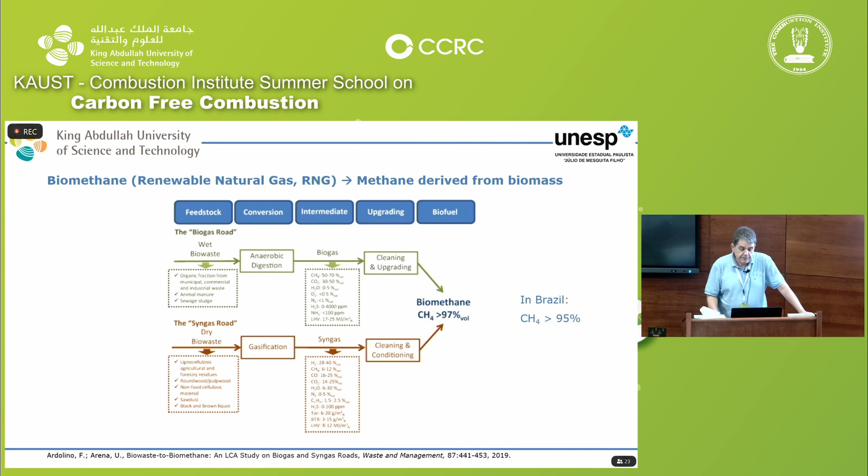The contents of my presentation: I'm going to talk about fuel gas interchangeability. How many of you are aware of the Wobbe index? Heard of the Wobbe index? Okay, good that I explain it. I'll cover biomethane production and distribution, use in industrial equipment like glass melting furnaces, ceramic tile furnaces, fluidized bed, sand dryers. I'm going to talk about some economic aspects and conclusions.

So, interchangeability. If you have a stove at home burning LPG, your burner is designed to burn LPG. Suppose now you want to burn natural gas in the same burner - it's not possible. You have to do something to the burner, because if you put natural gas in a burner designed for LPG, you're going to have a blowout of the flame. On the other way, if you have a burner designed for natural gas and you burn LPG, the flame will become yellow and make the pan very dirty with carbon residues.

So what do you want, instead of changing the burner? Here it's easy because it's a simple burner, but it's very complicated in terms of design because it is partially premixed. But what do you want? You want to put a fuel that does the same job - you don't want to change all the settings.

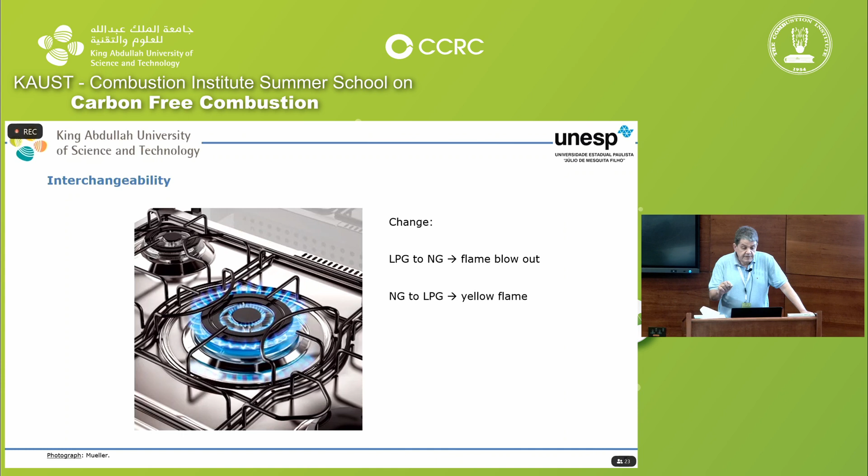Suppose here we have only one burner - it's easy, you have parts to make the change from LPG to natural gas, you can buy them easily. But suppose you have an industrial furnace with hundreds of burners, sometimes 10, 12, 20, 50 burners there. You don't want to change the burner. So what you do is prepare the gas. For example, if you have a furnace designed to burn natural gas and you want to burn LPG in there, don't just put the LPG - you mix LPG with something so that it becomes similar to natural gas.

And this is the Wobbe index, okay. The Wobbe index is the most important parameter for defining interchangeability. It's an indication of whether a burner can be operated with an alternative fuel without requiring adjustments or physical changes. So it's like having a car - you want to burn another fuel, but you don't want to buy another car. You want to prepare the fuel to burn in there.

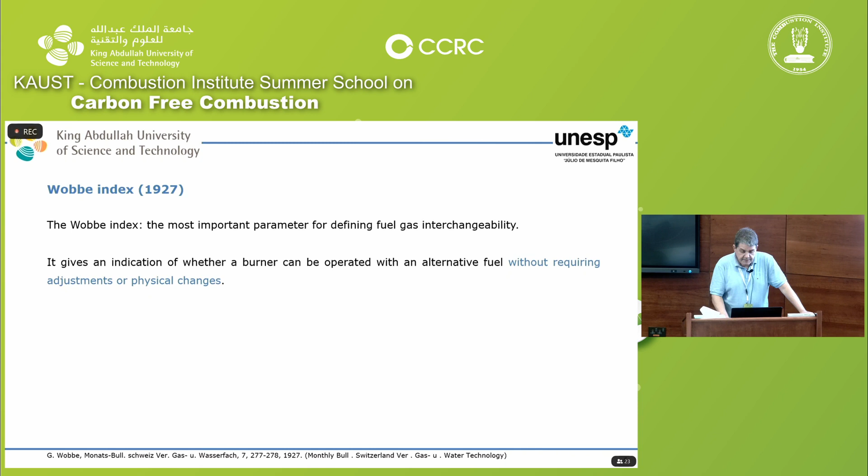The Wobbe index was developed in 1926, 27. I leave all the references at the bottom of the slides. The Wobbe index arises from the thermal energy in kilojoules per second, which is the calorific value of the gas - I'll discuss some about it. Sometimes it's not the calorific value of the gas, but the heat you need to have your product at the required temperature. But anyway, let's accept that: calorific value of the gas times the volume flow rate of the gas, so kilojoules per normal cubic meter multiplied by normal cubic meters per second.

So the formula... how do I get this in here? Go in there.

Okay, so the formula is here. You have a calorific value of the gas, and then this is the area, the orifice discharge coefficient. You can think about an orifice, and delta P over rho, square root of this, it comes from the Bernoulli equation, okay?

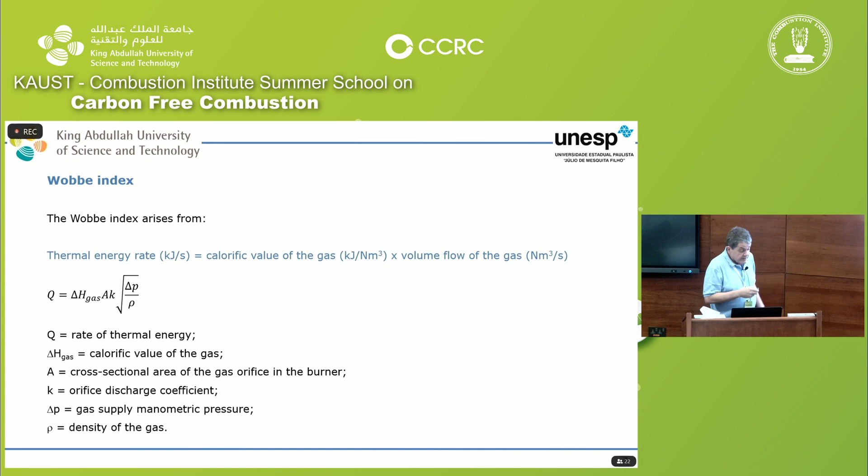So the formula can be written as, if you divide the density by the density of the air, you have here the relative density of the fuel, okay, or the relative to air, or density of fuel relative to air.

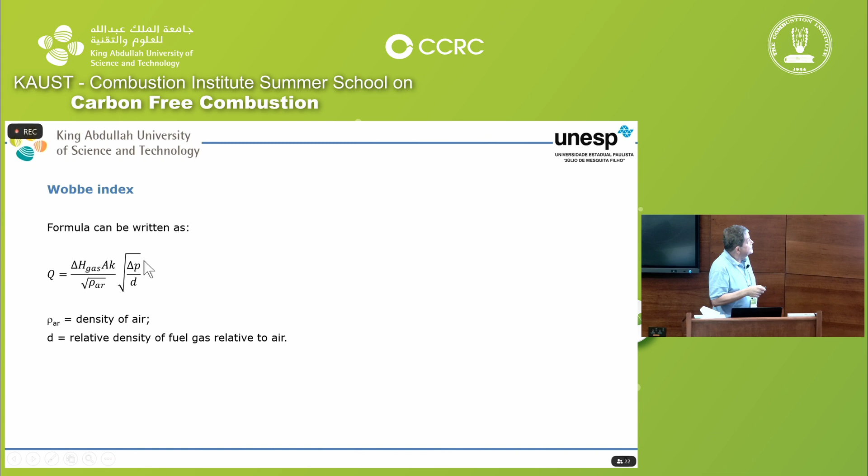Wobbe defined his index as delta H, or the calorific value of the gas, divided by the relative density, so that you have, just putting there, is the index. The Wobbe index times the area times the discharge coefficient multiplies the square root of the manometric pressure.

So in here, there are two types of Wobbe numbers. One is called the high. Instead of putting here, you put here the high heating value, and the low is the lower heating value that goes in here. I prefer to work with the low heating value. It doesn't matter which one you use, because you're going to compare, okay?

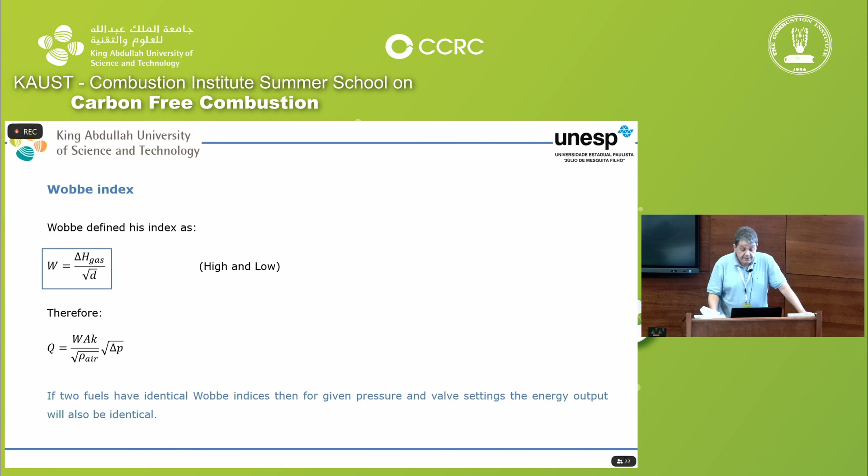So if two fuels have identical Wobbe index, then for given pressure - you see, given pressure here, okay - and valve settings, this is most important, the energy output will be also identical. One of the criteria for interchangeability of two gases is that the index are approximately equal within the range of plus or minus 5%. So to achieve an appropriate Wobbe index, gas mixtures are used for substitution.

Okay, so if you want to burn LPG instead of natural gas, it has to be mixed with something. A mixture of LPG and air is called, at least in Brazil, propane air - ar propanado. Not sure if it is the same. We have here something similar that we are burning.

We had a crisis in Brazil in 2008 and 2009, and industries were trying to get an alternative for burning natural gas. So we did some study on that. Just calculate the Wobbe number for natural gas, then you make a mixture and make it with the same Wobbe number.

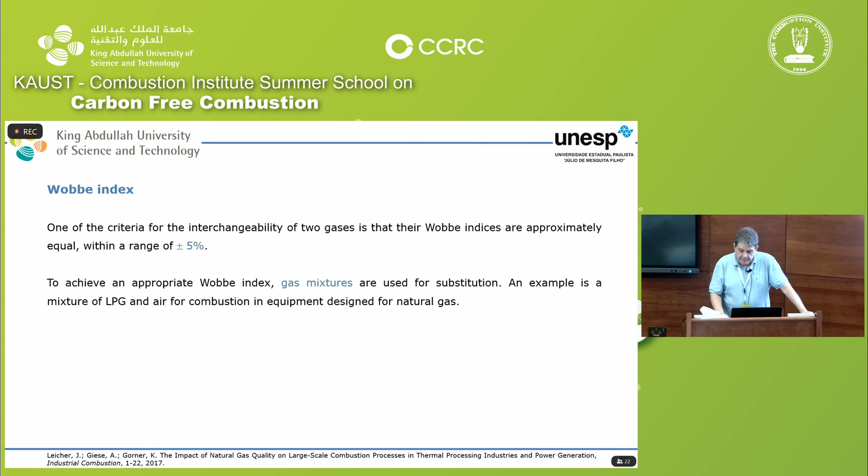There is also a modified Wobbe index, or Wobbe number, that takes into account the temperature of the fuel. It is the same thing, except that there is a temperature in there.

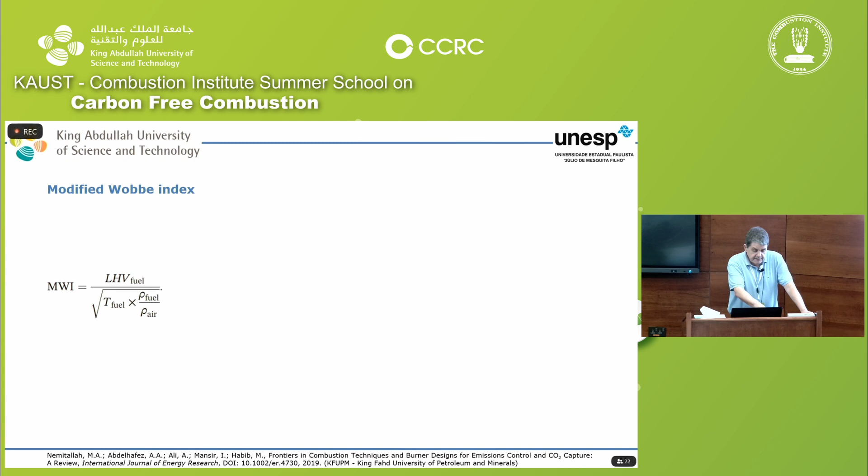Okay, you think, well, I have a burner here and I want the same energy output. Why don't I just increase the delta P? Okay, you can do it if you have one burner.

And each of the zones, they have their own settings, their own burners. So if you want to increase the delta P, or the pressure difference, because you put another fluid in there, another fuel in there, then you don't distribute it equally. Then it becomes a mess.

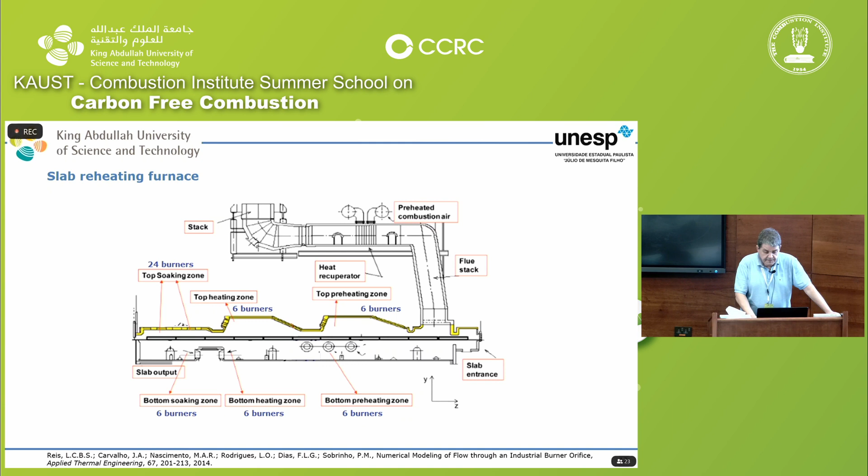And what you want in a furnace like this is the product. Okay, you have to have this slab at 1,200 degrees Celsius at the rate of 180 tons per hour. This slab, the weight of it is about 20 to 22 tons.

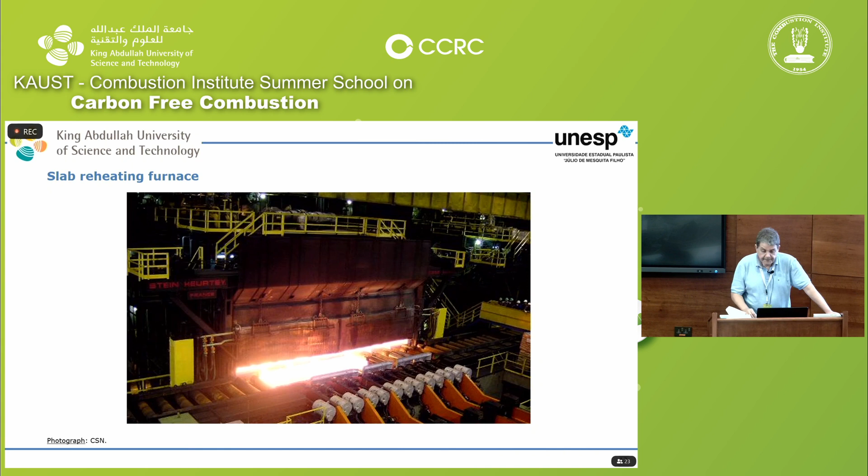Then you have primary aeration for premixed or partially premixed burners. Flame blowout is very important - I will show you one industrial application in which you cannot change the gas. You have to prevent flame flashback. So there is another index. Yellow tips, when the burner is partially premixed, you don't want it, so there is an index for that. Incomplete combustion.

It gives you a degree of how much CO you're going to have in the same settings. I'm going to talk about some...

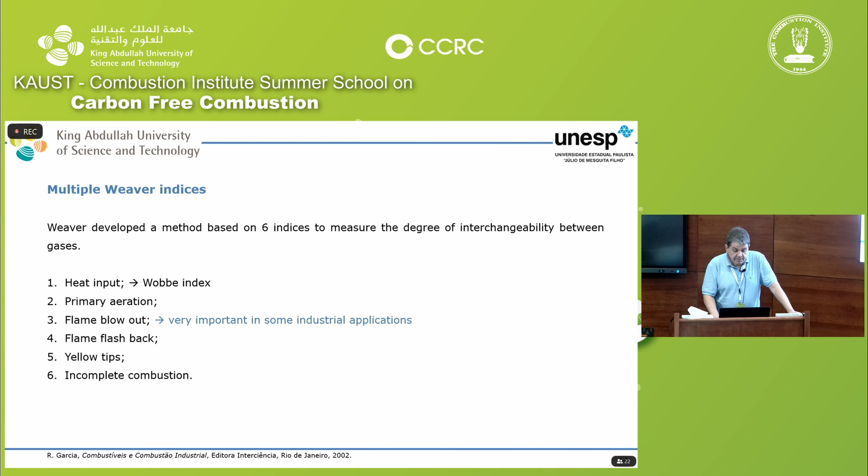Steel production gases. In steel manufacturing or steel factories, you have three types of gases. One is the coke oven gas that comes from the coke oven battery. The coke is something that you have to feed to the blast furnace. A residual gas from the blast furnace is called the blast furnace gas, BFG.

The composition, I took it from a site here, is about 20% CO, not 20% CH4. It is a very low calorific value gas, but it is energy. So why not use it?

And there is another one, the converter gas, called LDG, because it was first derived or studied in Austria, in the cities of Linz and Donawitz. This comes from the converter, also called BOF, Basic Oxygen Furnace Gas.

In Brazil, we have this at about 70% CO. It's a very dangerous gas, very dangerous. With 70% CO, there was an accident one day at CSN, Companhia Siderúrgica Nacional.

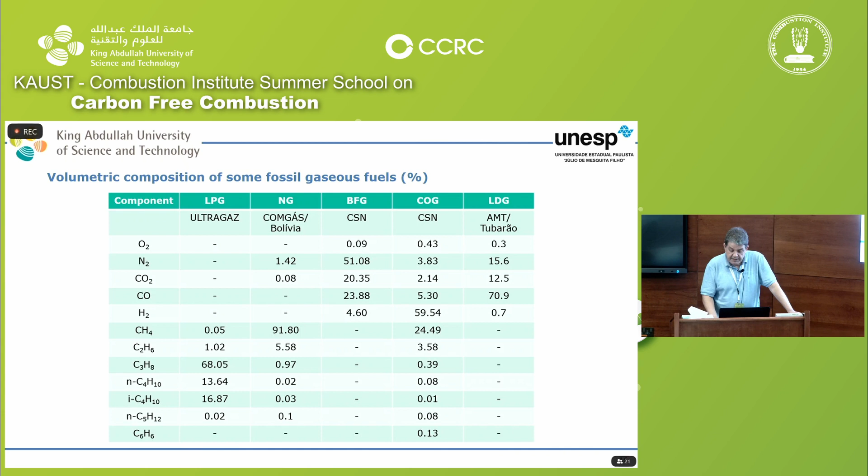So this is another project, another problem we got involved in: coke oven gas, as you see here. Coke oven gas has about 60% hydrogen.

This amount of hydrogen makes it a fuel that anchors in the burner. It becomes stable because of the amount of hydrogen. You saw earlier that hydrogen has a very high flame velocity, so it's easy to anchor any flame with hydrogen.

In one of our experiments, we had a free flame of methane, and we used only 3% hydrogen.

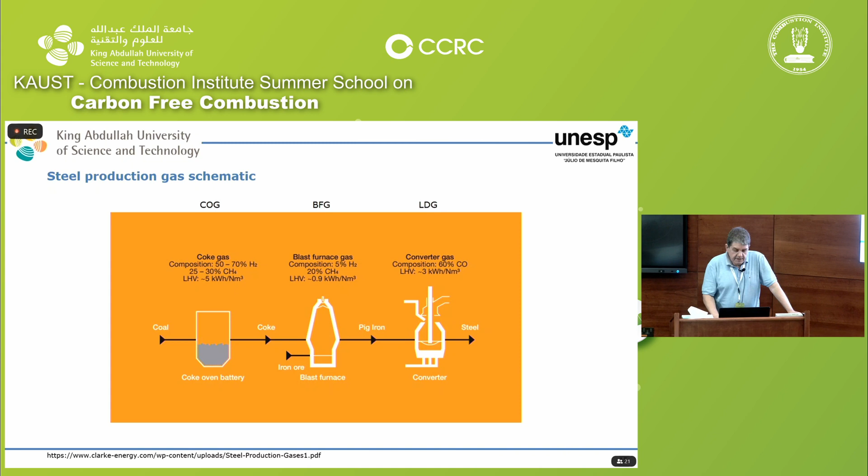So what do you have there? You have 212 U-tubes, about a quarter of them on top, a quarter down, and the same on the other side — half on one side and half on the other.

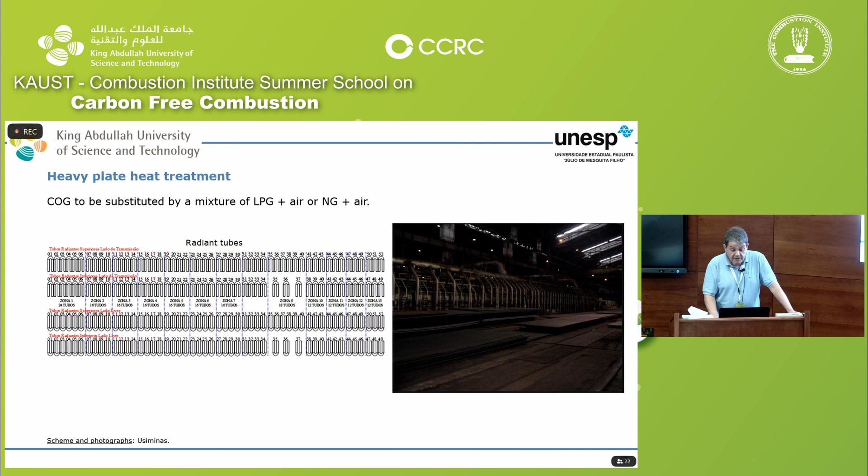What happens? You can make this mixture, but it's not going to hold in the burner. A problem arises when the flame goes out — you see these are the U-tubes that go inside the furnace. Here's the burner, it has a swirler, and this is the damaged tube.

So what happens? When they open the furnace for maintenance, about 25 to 30 tubes are damaged. You know what happens: because the coke oven gas is a dirty gas, it makes the diameter for the flow smaller as it deposits there.

So what happens is the flow gets high velocity, and sometimes the flame detaches from the burner. Then it travels through the U-tube, and the furnace is hot. Then you ignite the whole mixture inside the tube, and you have this kind of problem.

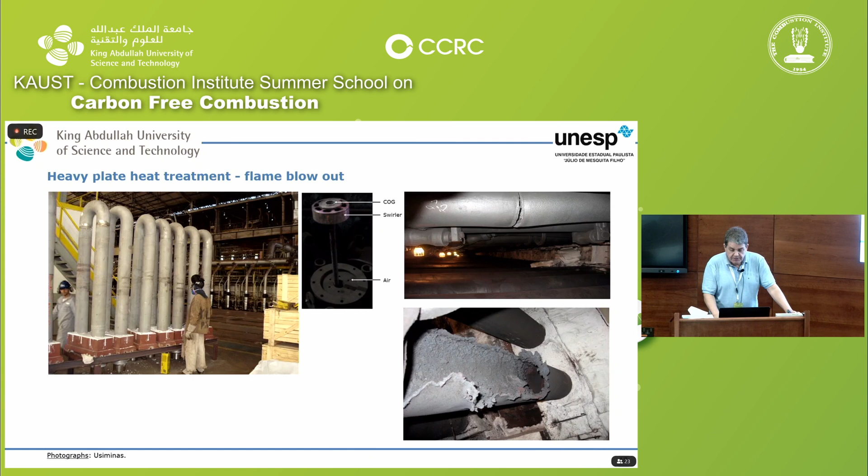So when it's impossible to change it without doing anything to the burner, you cannot do it. Other parameters for interchangeability are flame length, flame emissivity, furnace atmosphere.

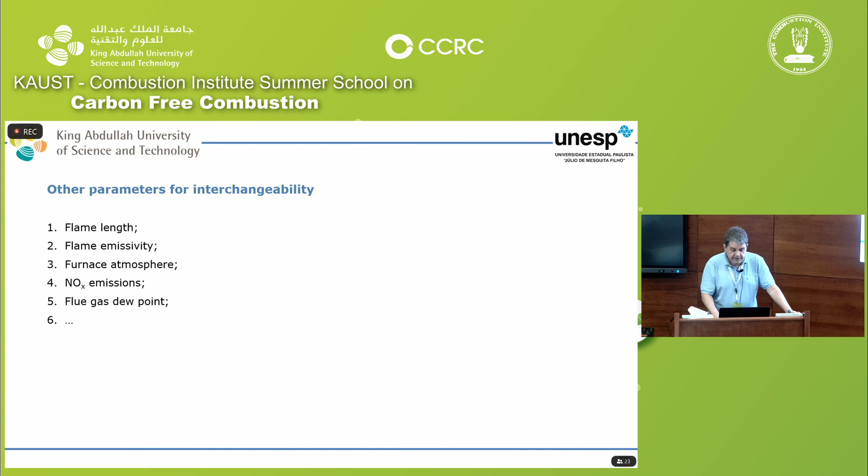You can put another gas in there and ruin the furnace atmosphere — NOx emissions, flue gas dew point. And here I have an example where the flame length is important.

You have, for example, a sintering machine. Sinter is one of the materials that go into the blast furnace. Besides agglomerating the mineral, it also contains some other materials that are necessary, like some carbonates. And it has about 5% - the sinter is mineral with 5% of coke, a very high carbon content.

Coal, okay? So it has about 5%, you have to ignite it. And the burners are burning from top to down. You can see the flames in here, okay?

Ignition requires some energy, and this energy has to be conserved. When you change the gas, you have to provide the same amount of energy. Also the flame cannot spread over the mixture - cannot spread, and also cannot be so very far from the mixture. It has to be almost touching the mixture so that it ignites.

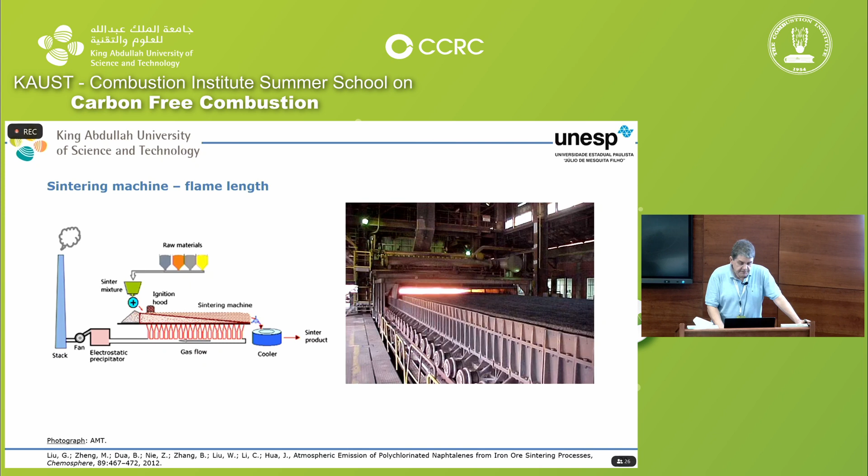Okay, now we start with biomethane. I told you about interchangeability. If you have a biogas, okay, and this biogas usually has from 40 to 60% of methane. In here, they're saying 65% is too much.

Because maybe this is biogas in Germany, but in Brazil, no. Brazil, it's 40 to 60. So methane goes from 40 to 60, and the CO2 goes from 60 to 40.

So you have many processes to extract the biomethane, and the ratio is about 400 normal cubic meters per hour produces 260 cubic meters per hour of almost pure methane. It is just a measure of how much CO2 you have in the biogas.

And then you have a residual gas with a lot of CO2. And when you take the biogas from a landfill and you produce a biomethane, or you either burn the biogas, doing a favor to the ambient. Okay? Because biogas is supposed to account for 14 to 15% of greenhouse gases from landfills because of the CH4. So you have a carbon credit just for doing this.

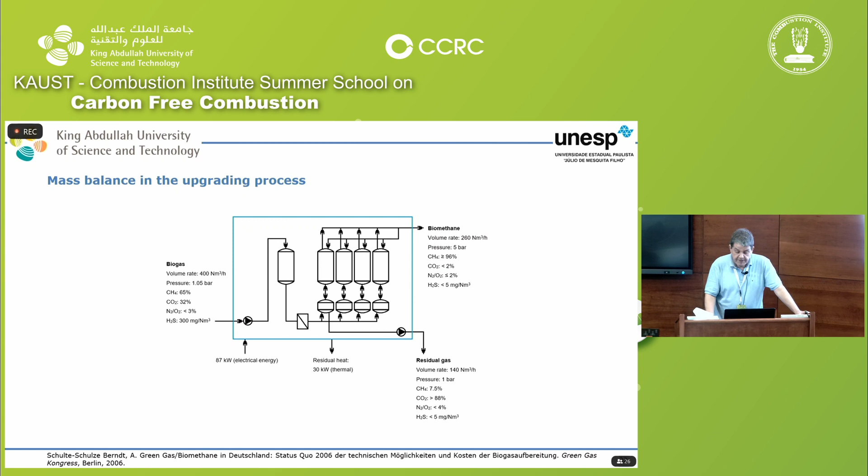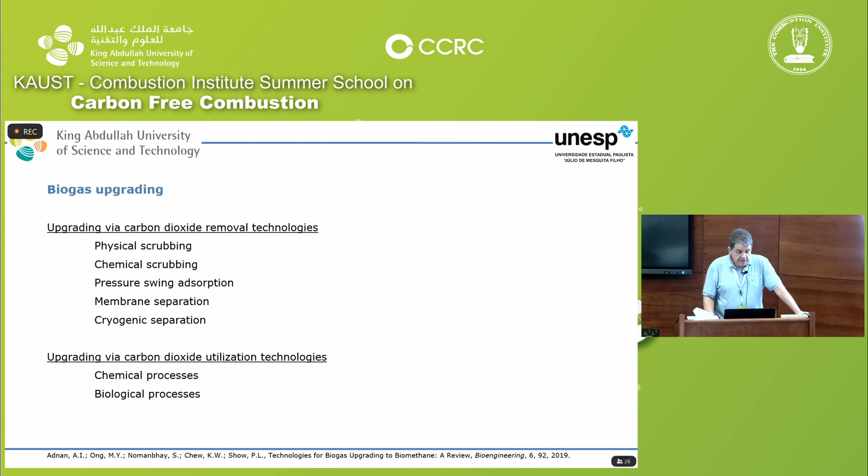Upgrading, biogas upgrading. Upgrading can be via carbon dioxide removal or carbon dioxide utilization. And there are several types of technologies, and all of them are described in this paper here, in 2019. It's a very nice one because for each technology, it presents a table like this.

You can easily see. I just took one from there, membrane separation technology, which is used in the case of the biomethane that we have near our home in Brazil.

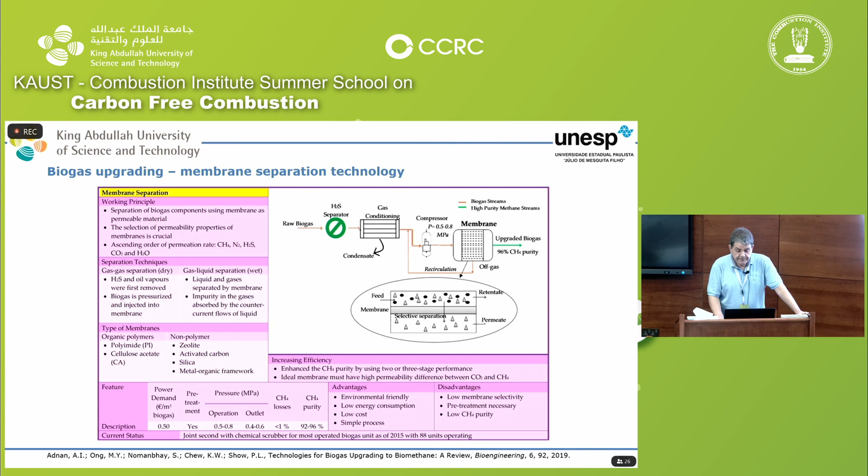In Brazil, we have today 4 plants authorized by ANP. In São Paulo, in Seropédica, which takes the municipal waste from Rio de Janeiro, about 10,000 tons per day.

Okay, if you think about a population, you can estimate how much waste comes from them. It's about 1 to 1.2 kilograms per person. São Pedro da Aldeia, also in state of Rio de Janeiro, and Caucaia in the state of Ceará.

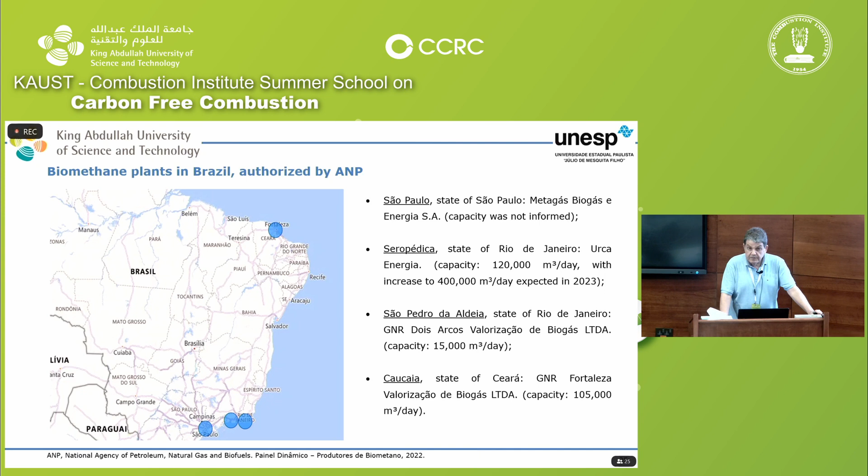In here you have also other plants, but they're not yet authorized by ANP. They are just starting development, okay?

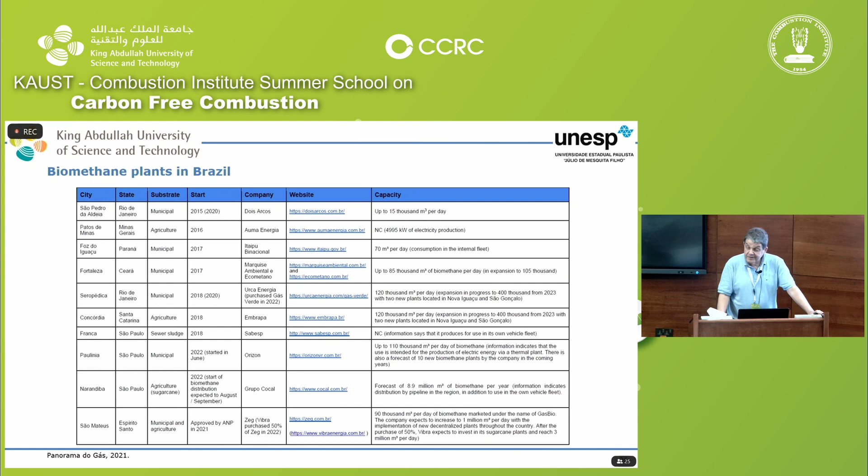In Brazil, we don't have a network for biomethane. It's delivered by trucks. And the trucks are moved by biomethane.

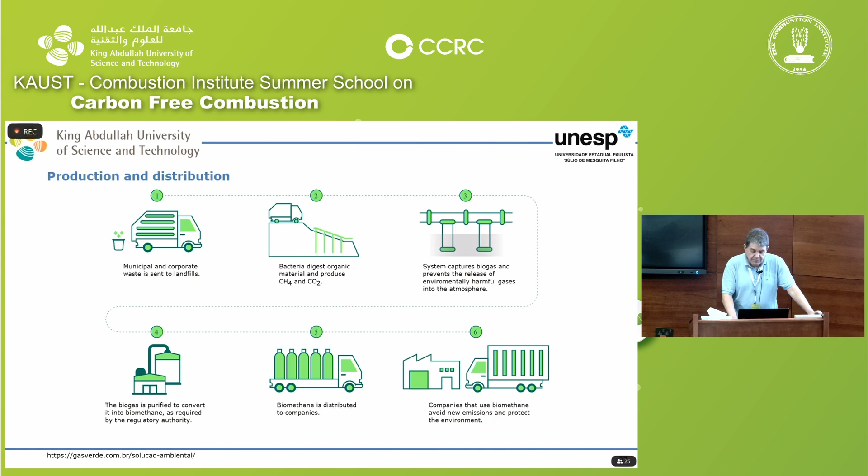Then you have one of the processes I outlined before: the biogas is purified to convert into biomethane as required by the regulatory authority. Biomethane is distributed to companies that use it, and this is their advertising, okay? Companies that use biomethane avoid new emissions and protect the environment. So how is it done in the industry?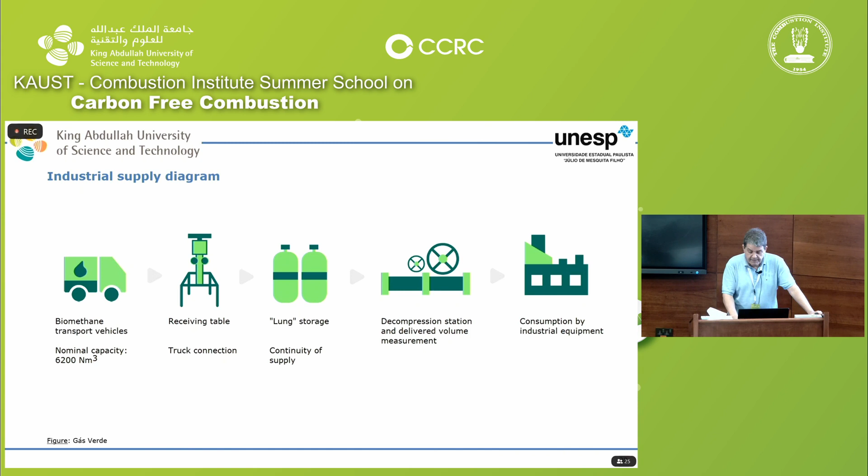You have the trucks. If you enter the site of Gas Verde, you can see trucks there. You have a receiving table, a lung storage for gases, a decompression station, and consumption by the industrial equipment. Usually you mix it with natural gas. Now we start the effects on industrial equipment.

The first one we're going to see is glass melting furnaces. It is a very high temperature furnace, working at around 1,500 degrees with 10% excess air. Air preheating is at 1,000 degrees.

Do you know? This is an easy question, I think. Everybody knows. Why does the industry preheat the air?

When you preheat the air, for example, if you have a furnace at 1,500 degrees, the process requires 1,500 degrees. So the combustion products leave the furnace at approximately the same temperature, so they have heat, they have energy in them. So what do you do? You exchange heat between the combustion products and the air so that the air enters heated.

So a glass melting furnace works like this: it alternates the flow of combustion products and air, with a valve that changes every 20 minutes. Why 20 minutes and not 30 minutes? This is the case in all glass furnaces of this type. You have an arrangement of regenerative blocks. When the hot combustion products pass through these blocks, they heat up. Then after some time you switch, and the air goes and gets heated while the blocks on the other side are heated.

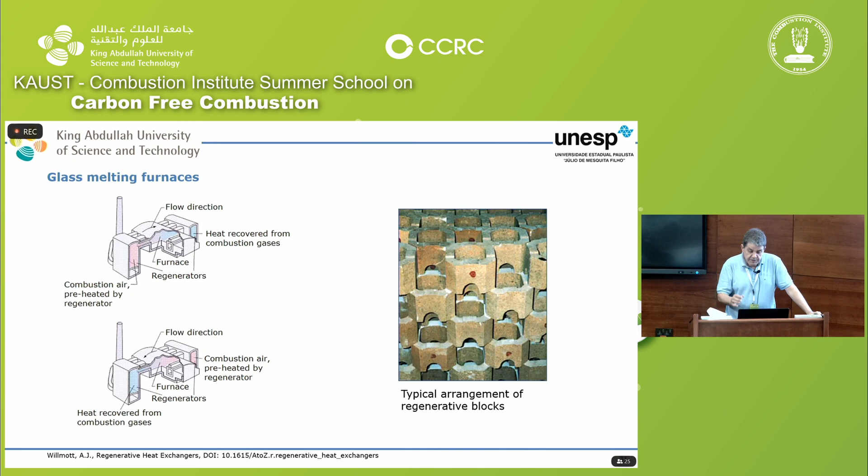This company is a Japanese company in Brazil, and they started to worry about biofuels. They wanted to know how they could change to biofuel, and we did work for them on biomethane, hydrogen, and also ethyl alcohol, but I'm just giving you the work on biomethane here.

This is taken from their site. It's called AGC, Asahi Glass Company. They are working to optimize the ecological footprint by reducing the fossil energy consumption of their production activities. They are consuming today about 6 million cubic meters per month.

And when I say cubic meters, does anybody know the difference between a normal cubic meter and a cubic meter? You know, but you don't really account for it. When you think about volume, it means nothing if you don't know the pressure and the temperature.

A cubic meter usually in Brazil is measured at 20 degrees Celsius. When you say normal cubic meter, it doesn't mean it's at 0 Celsius or 273 Kelvin - it doesn't mean the gas is at 0 Kelvin. It means you've just converted the volume to 0 centigrade, not 0 Kelvin, 273. Imagine a gas at 0 Kelvin. The cost of this natural gas in Brazil is more than $4 million per month.

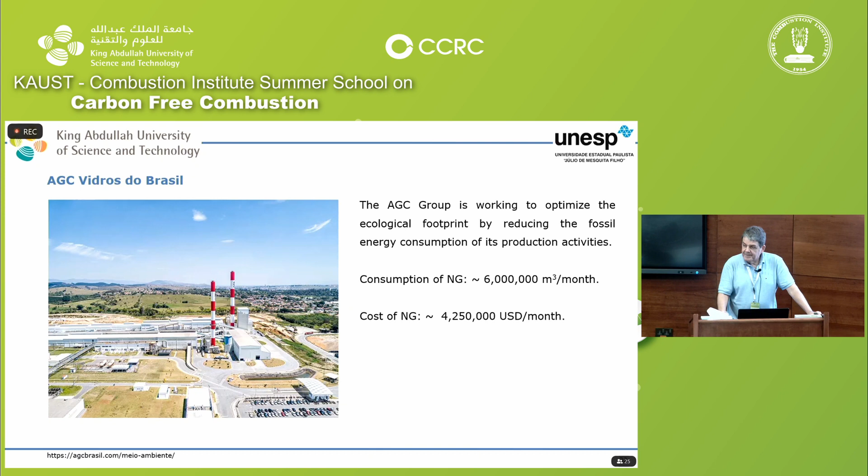They have 2 furnaces. You can see 2 chimneys here. It's very close to us - I think Diana saw them when she went there, on the side of the road.

And what is the criterion for interchangeability between natural gas and biomethane? So what did we do? We asked AGC to give us compositions of the natural gas for 90 days, and we also asked the guys at Gas Verde to give us the biomethane composition. As I said, Gas Verde is a company based in Seropédica, state of Rio de Janeiro, about 60 kilometers from Rio de Janeiro, which upgrades biogas produced by the landfill that receives 10,000 tons per day of municipal waste from the city.

Can you imagine what 10,000 tons per day of municipal waste is?

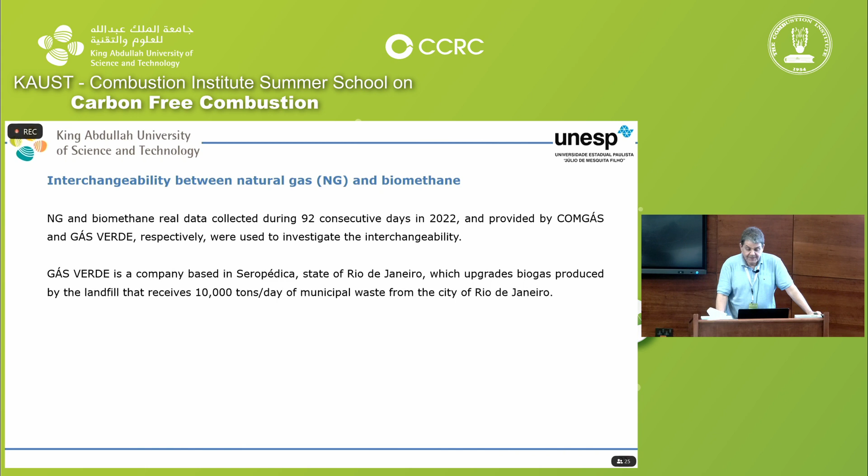It's funny that if you plot the air-to-fuel ratio for stoichiometric air-to-fuel ratio, what people call the ratio, for example the ratio for natural gas is around 10, it is a straight line. Funny, it's a straight line, but you can do it with more simple fuels, hydrocarbon fuels, and it comes out like that.

Besides this 180 data, I also had data from Ceará in 2018, northeast of Brazil, and it's also the same. So we're going to use that to see what happens.

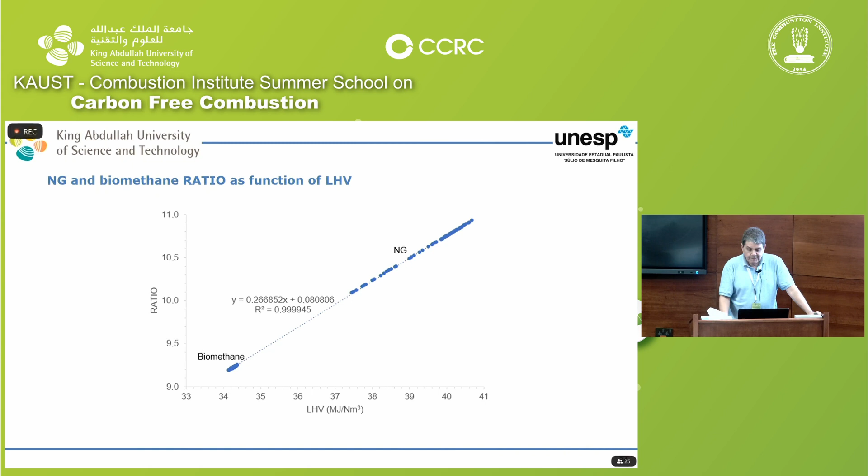On the other hand, the Wobbe index for natural gas and biomethane are out of the 5% range. So you cannot burn in the same equipment biomethane in place of natural gas. The natural gas itself, the variation is within 5%. But if you just exchange it to biomethane, you get problems.

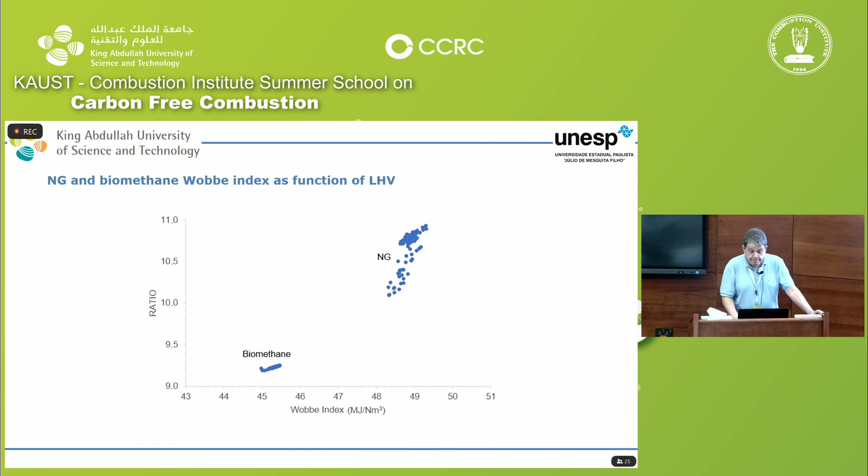We have a spreadsheet I developed that takes care of the mixture of 5 gases and calculates the air-to-fuel ratio, calculates all the parameters, the lower heating value. It's available to you if you want. It's simple, of course, but it's very handy.

I'd say it's very handy because ArcelorMittal in Tubarão, near Vitória - you know, in Brazil, Vitória is about 500 kilometers east of Rio de Janeiro - the control of their reheating furnace is based on that spreadsheet. It's not the same spreadsheet, but it has the same look I gave them. So it's based on the Excel spreadsheet.

So natural gas and biomethane - we computed with this spreadsheet a mix that takes the Wobbe number to 95% of the Wobbe number here. The mix is 70% biomethane, so with 70% biomethane you have a Wobbe number which is adequate.

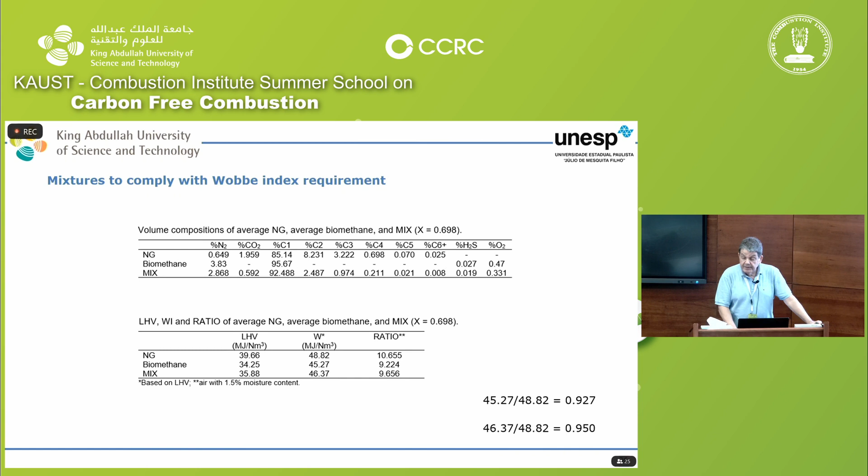Another thing I think is very nice is that the stoichiometric coefficient, or the normalized stoichiometric coefficient, the excess of air, is the same curve for all three of them - the natural gas, the biomethane, and the mix, which is the one with 95% of the Wobbe number.

So what do you have? Temperature of the furnace is 1500 degrees Celsius. It operates at 10% excess air, so the normalized excess of air is 1.10. The air temperature is 1000 degrees Celsius, the mix is almost 70%, and the Wobbe number of the mix is 0.95 of the natural gas.

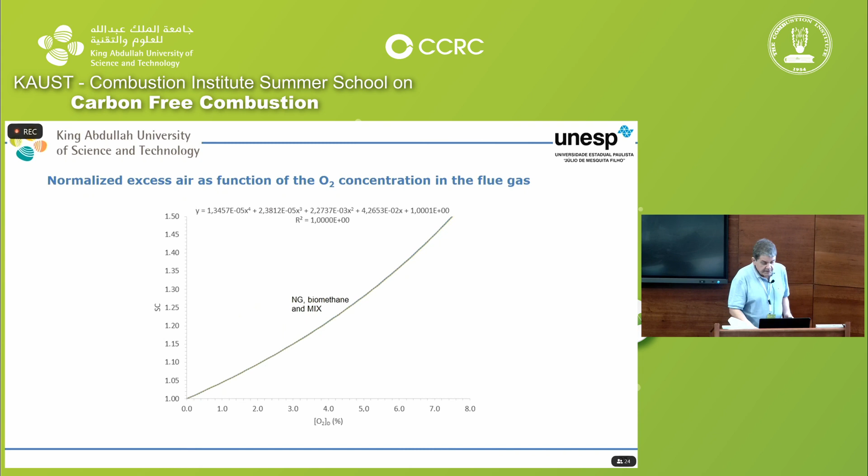So what do you do here? The LHV of natural gas from this table, divided by the lower heating value of the mix, is 39.66 over 35.88, which is 1.1053. In this case, what we require from one fuel to the other is 560 to 508, which gives 1.1025, very close to 1.1053. The other way is also: the LHV of natural gas over the LHV of the mixture is approximately the ratio. Remember, it's a straight line.

Then it comes to this slide that gave me the most problem. It's easy, but it's difficult. So what happens in an industrial furnace?

Usually the air is kept constant, the airflow rate is kept constant. And since the air has a volume flow much higher than the fuel, any variation you do in the fuel changes the temperature a lot, but doesn't change the volume flux - doesn't change almost anything. Because if you change the volume rate of the combustion products, you change the residence time, and if you change the residence time, you change conditions for heat transfer - it becomes a mess.

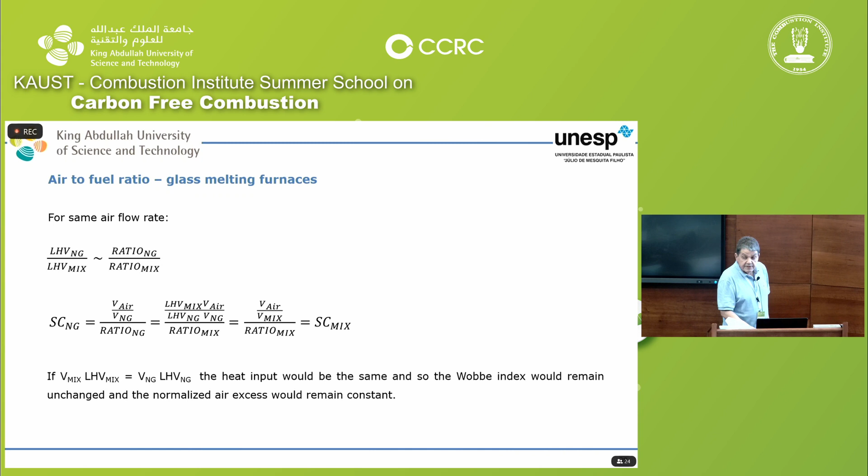But this is not what happens. The Wobbe index is 95% of the original Wobbe index. What does it mean? That when you change from natural gas to the mixture, the volume flow rate of the mixture is 95% of the value it should have, because the lower heating value of the mix doesn't change.

Therefore, the normalized air excess just after substitution is 1 over 0.95 of its original value. That is, instead of being 1.10, it goes to 1.158. Temperature will be lower than required because the heat input is 95% of its original value.

So what does the control do? The control is based on temperature. It adds more fuel. The furnace controls bring the temperature to its required value by increasing delta P, and in consequence, the volume flow rate of the mixture. The normalized air excess will return to its original value, 1.10, and the furnace atmosphere will return to the original in terms of oxygen concentration, because of this graph.

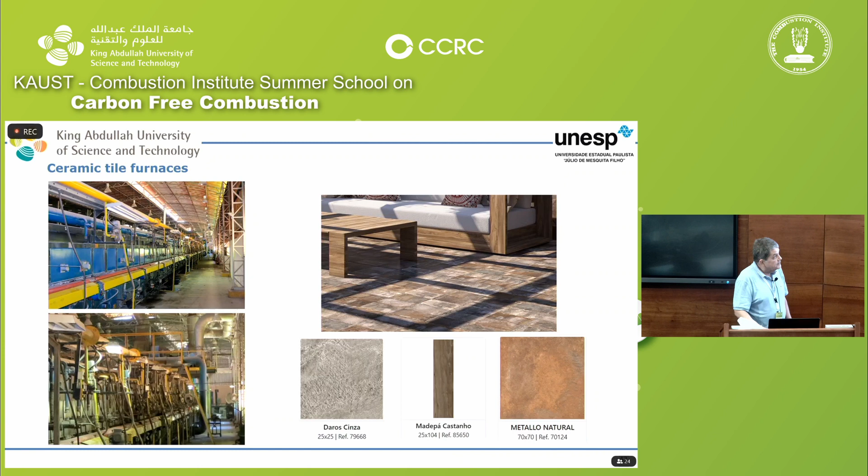For a mixture of biomethane and natural gas with 95% of the Wobbe number, controls do the same. First, when you change, the temperature goes down, and then the control injects more fuel.

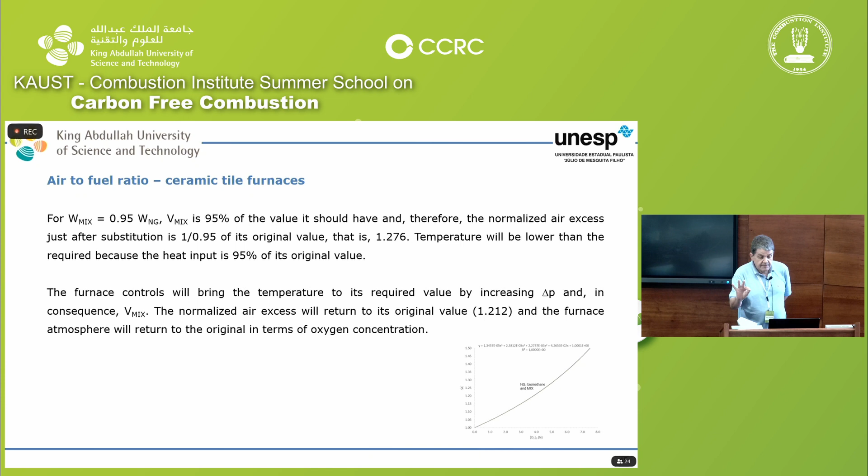And I did here, in the case of this furnace, or tile furnace, this 1.212 is the one that gave about 4% of oxygen requirement, the least that the furnace can have. Because if you have less than 4%, it interacts with the product and makes bubbles in the product.

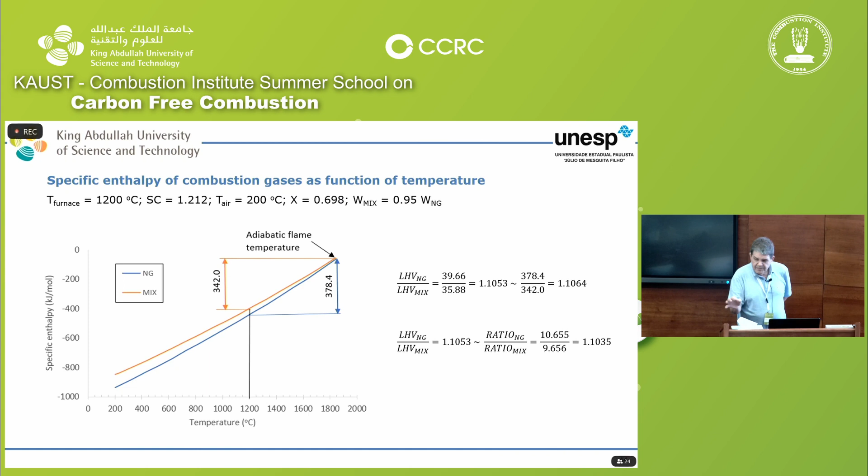You see, if you keep the air constant, what do you do? This one you get from the spreadsheet. For 1 unit of fuel, in here, 1 unit of fuel, this is for the mix. You require 11.70 for the air, and you have 12.73 for the products.

But if you want to make this 11.7 into 12.91, you multiply everything by 12.91 divided by 11.7. So you increase the fuel, you have the same excess of air. The products go to 14.05 instead of 14. And the residence time, this is 1 unit, decays from 1.000 to 0.997.

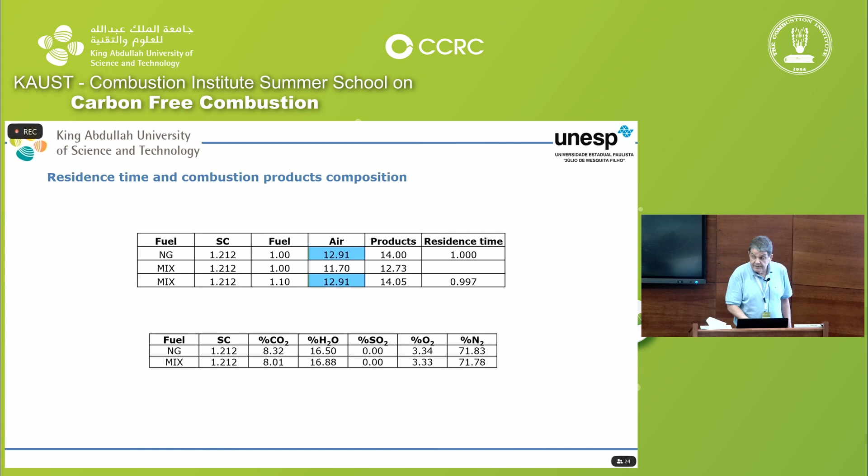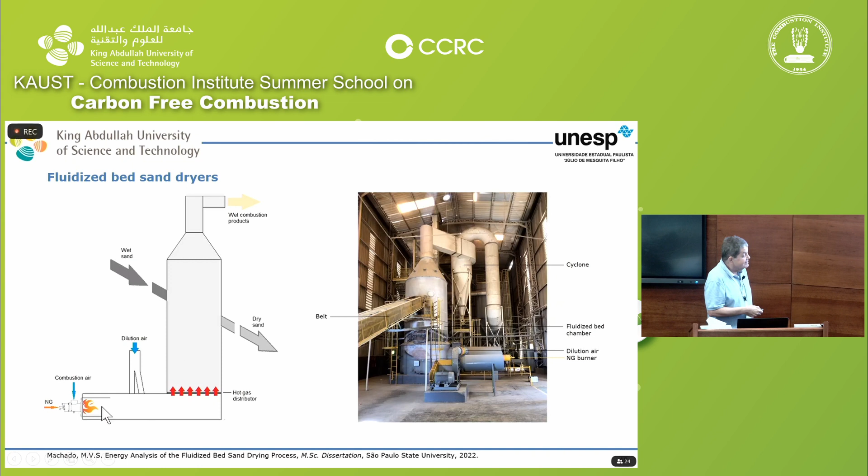So what do you have here? What's the requirement? Your product is the sand. What you require when you exchange from one fuel to the other fuel is the same flow rate and the same temperature, which is easy now because you have only one burner. The control does that too.

And in this case, we have, you see, for 500 degrees, the normalized air-to-fuel ratio for natural gas is 5.659, and the temperature is 500 degrees. I didn't tell you how I do the curve with temperature, it's with an equilibrium program. My spreadsheet also has a procedure to do it with the equilibrium program. For biomethane, it's another normalized air-to-fuel ratio, and the flue-gas fuel ratio is 53.06.

So what do I need? What do I see here? 60.30 normal cubic meters of air produce 61.38 cubic meters of flue gas at 500 degrees when NG is burned. The same: 60.3 normal cubic meters of air produce 60.30 divided by 52.06 times 53.06, same thing as we did before, which is 61.46 normal cubic meters of flue gas at the same temperature burning pure biomethane. At a constant airflow rate, the flue gas therefore increases only by 0.13%.

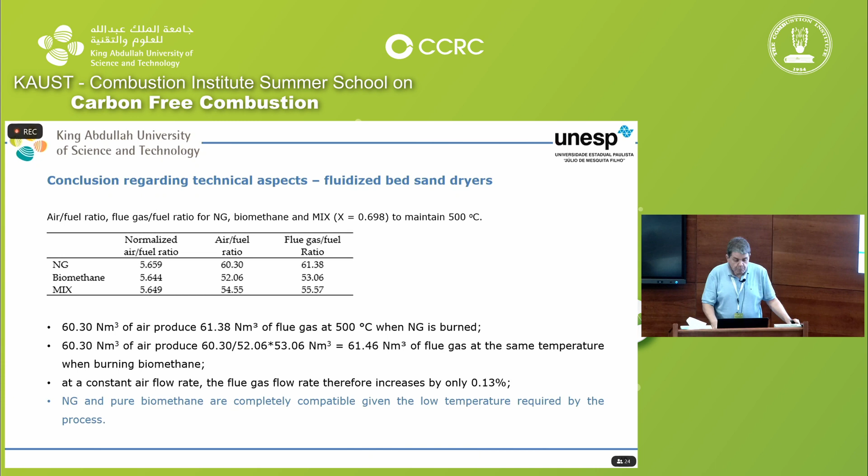Now we're going to talk about the economic aspects. The prices in February 2023 in Brazil: biomethane was 0.831 USD per normal cubic meter, transforming this to cubic meter at 20 degrees. So what do you do? You just multiply it by 273 divided by 293.

273 is 0 degrees Celsius, and 293 is 20 degrees Celsius, giving 0.774 USD per cubic meter supplied by trucks. And they could only supply 10,000 cubic meters per day. One of the problems that we have with biomethane in Brazil, and maybe in Europe too, is that supply doesn't meet the needs of natural gas consumption. So the natural gas for consumers who use more than 2 million cubic meters per month is 0.76 USD per normal cubic meter, so it's 0.708 USD per cubic meter. So what happens there? The cubic meter of biomethane is higher than the cubic meter of natural gas.

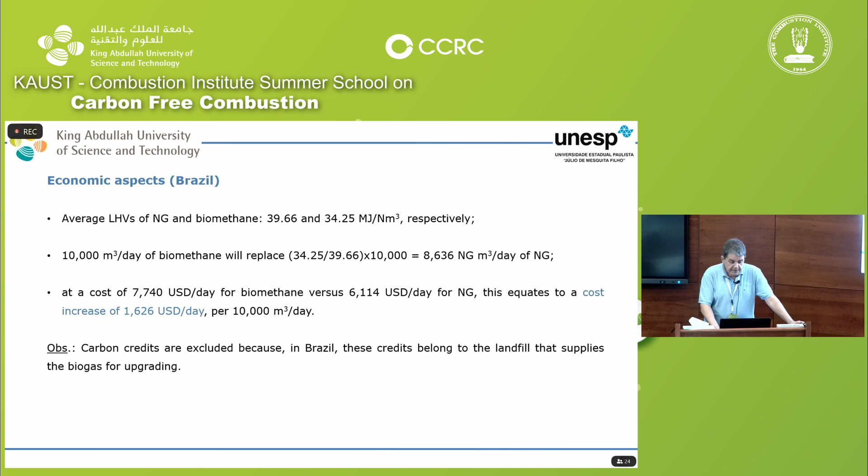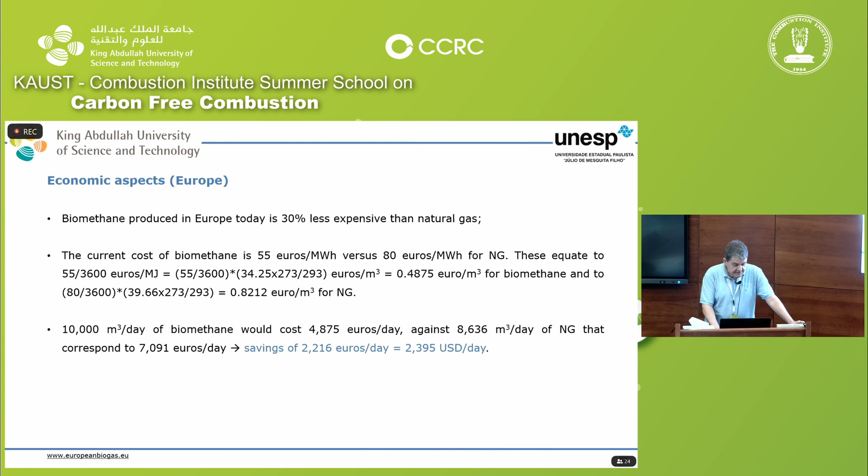Because in Brazil, the cost increases. So what happened in Europe? Before the crisis, you can guess what the crisis is, the Russia crisis. I don't know if anybody here can question the values. I got this from the European Biogas site, just yesterday.

So before the crisis, natural gas was $0.2 per cubic meter. Brazil didn't have a crisis, I mean it's a constant crisis maybe because the price of natural gas is very high. We didn't have a crisis, but you know the price of natural gas was high.

Now with the problem in Europe, the natural gas increased in price and the biomethane stayed the same, at least this is what the site says. So nobody against these prices.

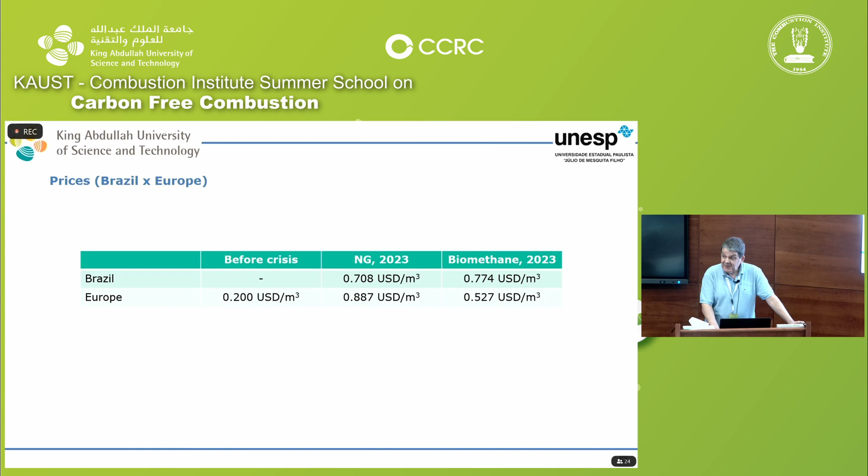Economic aspects: biomethane is likely to be more expensive for consumers than natural gas. I think when the crisis stops in Europe, maybe the prices will go down. Biomethane prices are expected to decrease due to higher carbon allowance prices, and these are going to make a difference. Prices are projected to increase for natural gas, even in cases without a crisis.

Conclusion: Biomethane can be a substitute for natural gas if supply is constant, and the process is easily convertible from natural gas to biomethane. However, biomethane is not a good substitute for coke oven gas in the baking company—there will be flame detachment, and combustion equipment has to be redesigned and built, which is very expensive.

Supplies don't meet all natural gas demands, at least in Brazil, where 2 million is expected by 2027. When I presented this at AGC, the manager said this does not supply only the glass companies in Brazil.

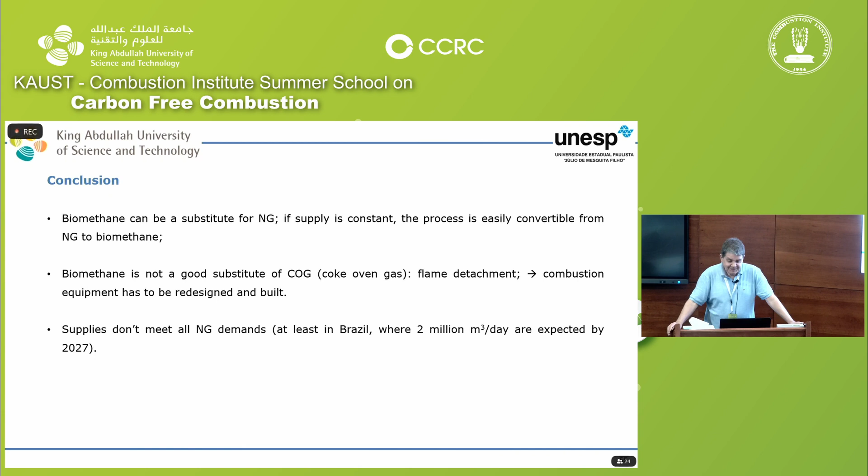Thanks, João. Very interesting. Do we have any question from the audience? Was my English too bad? No, your English was good.

I have two questions. The first one: how do you explain that the cost of natural gas can depend from country to country—this we can understand—but the cost of production of biogas, I was expecting it would be less expensive in Brazil than in Europe, because you have more space to install the plant and the labor cost is less, so it's almost double in Brazil. Can you explain why? Maybe it's because the technology is starting now. Everything that starts in a country without competition, prices go up. But they are selling everything they have, like the landfill Gas Verde Seropédica, just because of the carbon footprint. Companies in Brazil are becoming really interested because of fossil fuel concerns.